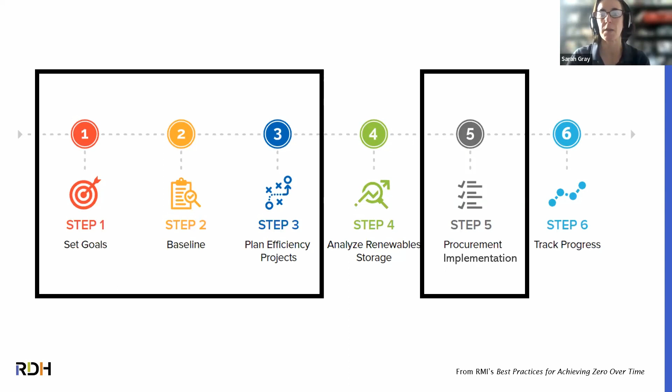I mentioned one of the first steps after communicating and documenting goals for a deep retrofit project, and that's really the baseline building assessment. For folks who have started to look at retrofit plans, hopefully you've implemented this and are familiar with these steps where we want to take existing building documentation, such as the original construction drawings or architectural drawings, looking at previous condition reports or maybe energy audits, and understanding the current state of the building. That work may also include a visual review of the building elements, including the mechanical systems and the building enclosure systems. We also may, depending on location of building, want to look at the structural and seismic condition of the building, because when we do deep retrofits, those can also facilitate any seismic strengthening or retrofit that may need to be done.

Beyond the physical building condition, we certainly want to analyze the utility or energy data for the existing systems. How efficiently are the mechanical, electrical systems running? What kind of use - is it in line with similar buildings of a similar age? Is it way high? Is it way low? Just understanding the building as it's operating in its current state. So that's the baseline assessment.

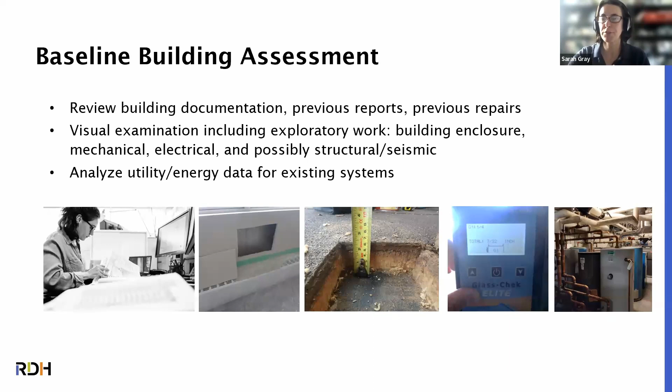From there, RDH has found that there's typically a formula for the deep retrofit plan, regardless of building or location. Of course, there are custom pieces depending on repairs that have already been done or systems that are in place, but the formula for the deep retrofit is typically as follows.

We find that we typically need to retrofit the building envelope as one of the first steps, because if we improve insulation values, reduce air leakage through the windows and wall systems, we can reduce the loads that the mechanical systems have to supply. So this building envelope work is pretty hefty, but it's addressing the passive system to enable a better performing, more efficient mechanical system.

That's the next piece - looking at energy efficiency measures, which could include LED lighting, tweaks or optimization of the heating and cooling system, and looking at ventilation that's currently provided. As part of a smaller scale retrofit, we could recommission those systems to perform better using the current equipment. That could be a short-term step on the road to a deep retrofit.

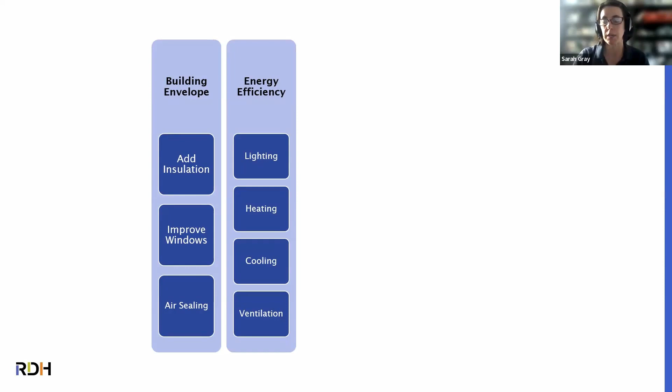The big step, however, as most of you could appreciate, is decarbonizing the fuel system. That's what we typically call a fuel switch from gas - natural gas or oil even - to an electrified system. Owing that some grids in Canada are still quite dirty, and hopefully there are plans in place in those jurisdictions to make the grid cleaner. Ultimately, we expect that many or most systems, depending on location, will get fuel switched.

You may have seen ground source heat pump, air source heat pump, VRF systems, or other high efficiency, typically electric systems to get us off the gas and reduce those greenhouse gas emissions. So that's the bundle of systems.

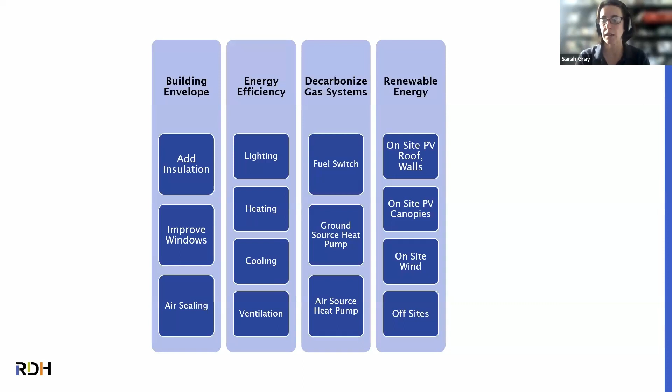I mentioned renewable energy - we won't go in depth today, but really the point of renewable energy is, one, a resilience measure. If we're generating electricity on site, we're not dependent on what's going on at the grid or other systems. We can also further offset our greenhouse gas emissions or energy use by generating our own electricity on site. Then the final piece of some deep retrofits, again depending on all of the other four buckets, is to purchase offsets to get to a net zero carbon, net zero greenhouse gas condition.

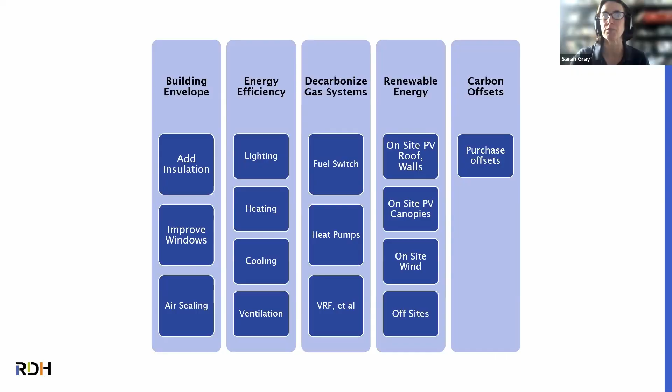Okay, so hopefully that gives you a high level view of what a deep retrofit plan typically consists of. Drilling down a bit for enclosure or building envelope retrofit options, as I mentioned in that first bucket, we're looking at the cladding.

The cladding retrofit typically means an overclad to provide more insulation. It could be a full cladding replacement where all of the existing cladding is removed, stripped down to bare bones, and reinstalled with a high performance system. There may be some thermal bridges such as balcony slabs or exposed floor slab edges that need to get over-insulated to reduce those thermal bridges.

For windows, if we have a fairly good window system, we could extend their life a little bit by adding weather stripping or sealing. But ultimately, we expect that windows would need to get replaced with a double or triple pane IGU system, or even quad pane glazing in some far north climates that are more severe.

Jurisdictions are starting to allow fiberglass frame windows that provide a bit more performance than aluminum frame systems do. Certainly there are passive house window systems coming to market, a bit tricky getting those from Europe to here, but we do know of projects using passive house rated window systems.

Roofing typically would be dealt with at the end of service life, looking at adding insulation to the field of the roof to provide better performance. That approach depends on the building form. If we have a tall, skinny building with a fairly small roof, it may not make sense to add insulation to the roof, so that's one of the pieces we'll assess during the information gathering step of the retrofit plan. For underground parking garages, we typically want to insulate the soffit or ceiling space under the occupied building footprint. You typically see that in new construction, but older construction may not have that insulation.

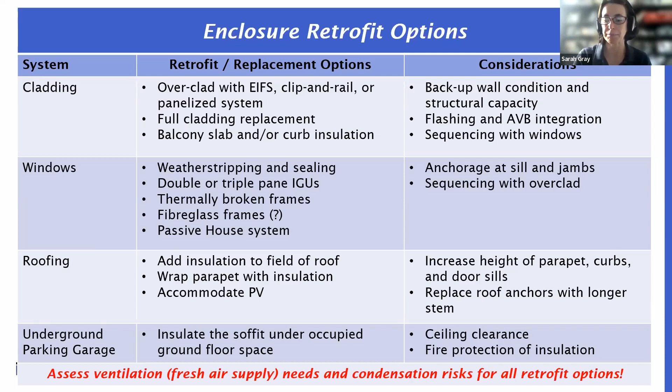Speaking of which, these are the mechanical and electrical retrofits that we typically see. Again, not every step or feature applies to every building, but this is typically what we're seeing, and hopefully you guys do too.

For heating, we're switching from electrical resistance or natural gas fired systems to an electrified heat pump that has better controls to help that system run more efficiently. And thinking about domestic hot water, how we can recover heat from the drain water to preheat the domestic hot water.

In terms of cooling, we find that many older residential apartment buildings in Canada do not currently have cooling. That's true across the board, from Atlantic Canada to the buildings I work with in Ontario and also buildings out west. They just don't have cooling. And because our summers are getting hotter and more intense, and unfortunately with Alberta dealing with wildfires, and British Columbia in the past, you can't always open your windows for free cooling and ventilation.

We talked about ventilation and fresh air; certainly those pieces should have energy or heat recovery to make them more efficient. We're also finding that many older buildings need a full electrical service capacity upgrade, at either the building level and/or the utility transformer level, which is a major piece of the puzzle and one of those enabling measures that will need to get done if we're adding electrical load at the building.

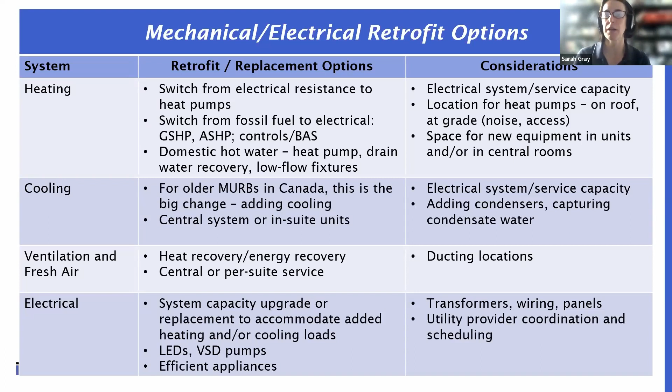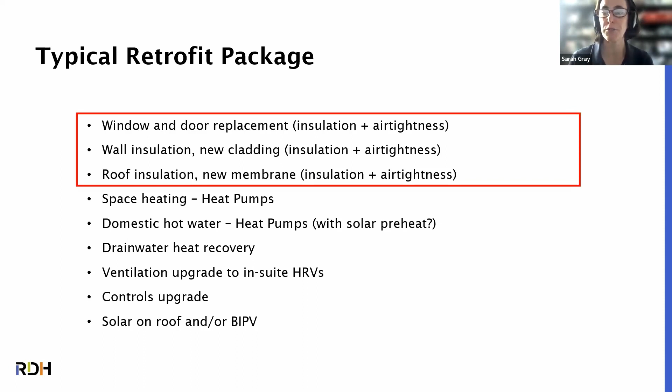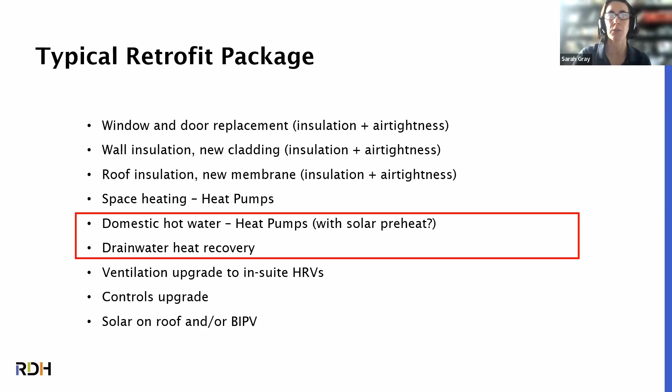We talked about some energy efficient measures, so let's talk about that typical retrofit package, rolling it all together. The first three bullets are the building envelope retrofit package. Next is space heating, switching to probably a heat pump type system or possibly other options depending on the specific building case. Looking at domestic hot water, again moving eventually to a heat pump system, possibly with a solar preheat system depending on the jurisdiction. We talked about drain water recovery, and then that ventilation upgrade, in-suite or central HRV or ERVs, control upgrade as well, and that solar piece.

As that package is put together for the building, there may be various timing changes. You may not do those first three enclosure bullets first; maybe your envelope is okay. Maybe you're going to address space heating and/or cooling first because the boilers are 30 years old and 80% efficient, and those need to get dealt with from a service life and efficiency point of view first. There are a lot of options, and it's a team effort working with the consultant team and also the ownership and building management team to create a plan and order of implementation that makes sense for the particular building.

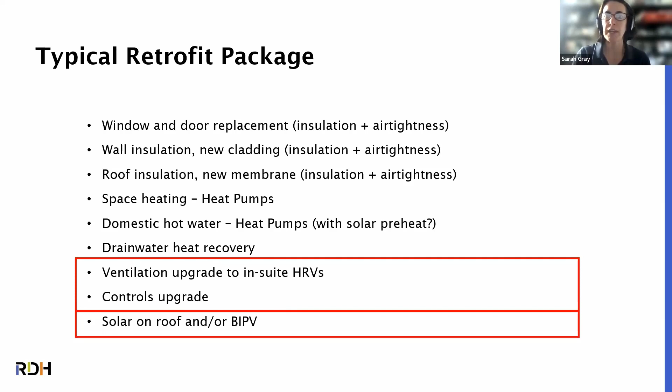I'm not drilling into specifics further on this. I could give you oodles of examples, and I think we may all have a picture of what these pieces mean. I think we'd agree the ultimate goal is to conduct not only a retrofit at scale, but to have panelized overclad at scale, with off-the-shelf mechanical systems at scale that we can plug in, maybe even as part of this cladding overfit.

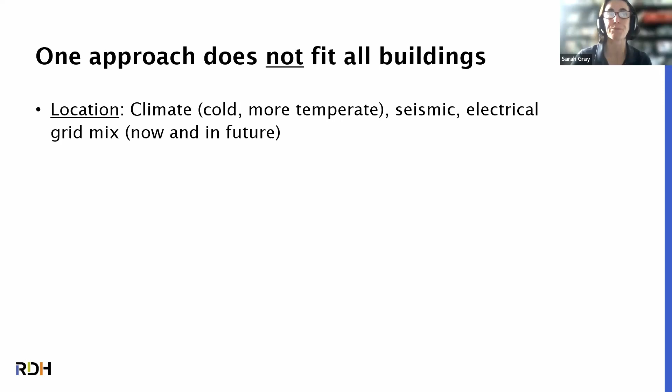And the electrical grid mix now and in the future, as I mentioned, and certainly does the building itself have electrical system capacity? Then zooming into the site itself, how is the building located?

We're finding in Toronto and bigger cities that many of our older residences, mid-rise or high-rise, are on very tight sites, which is great for urban density and a rationale for retrofitting. But it's very difficult to add insulation to the outside without triggering site plan approval, zoning bylaw amendments, and other jurisdictional approvals. Not to say we can't go through those hoops, and in some cases we are, it's just another layer of complexity to these deep retrofits.

The building form is also a consideration for the approach. Is it a flat box, low rise, mid rise, or high rise, that may lend itself to an at-scale panelized cladding approach? Or does the facade have a high level of intricacy that really necessitates a bespoke, manual, hands-on retrofit approach?

And then, of course, we have funding and incentive demands and requirements. I know the CIB has touched on some of these sessions. I'm not going to tackle funding and incentive, but on the projects RDH is working on in BC, we're working hand in hand with funding and incentive providers, and those particular programs have specific requirements and exclusions. Again, meaning it's not a one size fits all retrofit approach. We have to customize the plan and the details to meet that building's requirements.

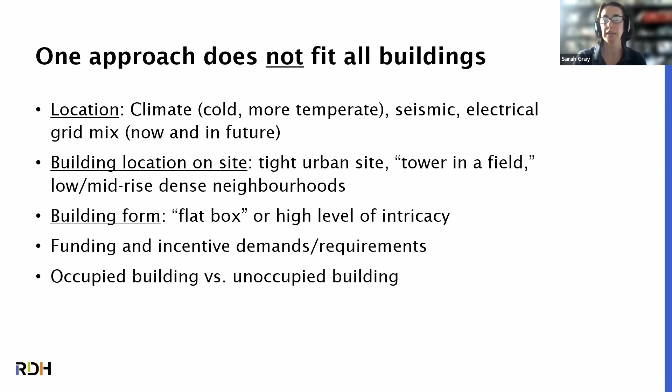Likely not new ideas to many of the folks on this call, but I wanted to highlight these intricacies. So I've touched on a few things, but I wanted to put a stake in the ground in terms of some of the lessons learned so far. Retrofits are complex projects. We hope to get to an at-scale, replicable model soon.

We're not there yet. I want to talk about project team. Retrofits are a team effort. We could have utility or funding clients, the building owner who's possibly paying for these projects or cost sharing with an incentive program. And then we have a consultant team of designers and engineers—architecture, building envelope, structural, energy modeling—maybe various mechanical consultants, electrical consultants, and specialty consultants.

So all of this team has to come together to be on the same page. Not to say that the size of the project or team makes it complex, but one could imagine getting everybody together for meetings, getting everybody together in terms of deadlines. It takes a village. So at the beginning, we want to identify and enable a team lead, potentially a single point of contact that can work with the design team and also the stakeholder team to serve as a clear line of communication. And as I mentioned, engaging regularly with the client and project team—weekly meetings, bi-weekly meetings—to make sure progress is being established and everybody is moving down the same path towards the same goal.

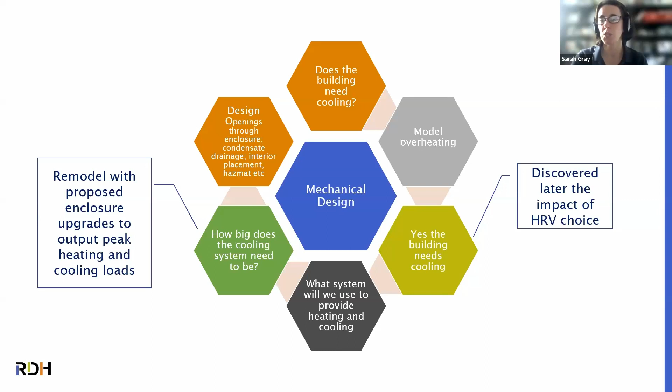And then we went through the design options and some really fine granular design detailing that needed to be done around that cooling system. So this is just one facet of the design questions and answers that need to be accommodated within the design process. You can imagine many other questions coming out related to heating, electrical, plumbing, enclosure, roofing, walls, windows. It's not just as straightforward as 'improve the building envelope' or 'improve the mechanical systems.'

And lots of coordination, several packages—not quite as straightforward always as a simple design-to-construction-documents package. There may be variations within that theme and within those phases, so that all pieces are coordinated and approved by the building owner who's buying this design.

Another big lesson is to let the building lead the design. Again, there's not always that one-size-fits-all approach. Each building will typically have its own peculiarities.

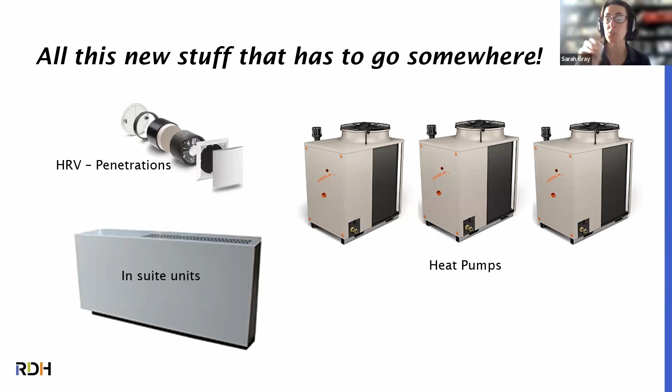One of the pieces we found is we have to put all of the new stuff somewhere in the building. That includes HRV packages and the penetrations that go through the wall or the roof. We mentioned heat pumps—those have to go either up on the roof or somewhere on the side at grade that's out of the way. And we have in-suite units, typically new in-suite units, that will have to be placed somewhere and serviced with electrical or piping. It's all got to go somewhere. This is a screenshot of a roof plan on one of RDH's retrofit projects.

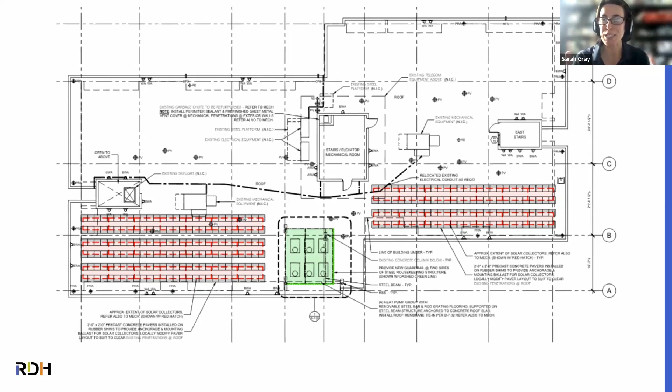The red blocks towards the bottom are new solar preheat panels, and the green is where we landed on putting the new heat pumps. So every building design team will need to look at a similar plan to understand where all the stuff goes.

Looking on the inside, I know the font is tiny here. This is just the mechanical schematic. Where are we going to fish through all of the stuff through the height of the building to service the suites, to deliver the new heating, cooling, electrical systems? It is a puzzle, I will tell you.

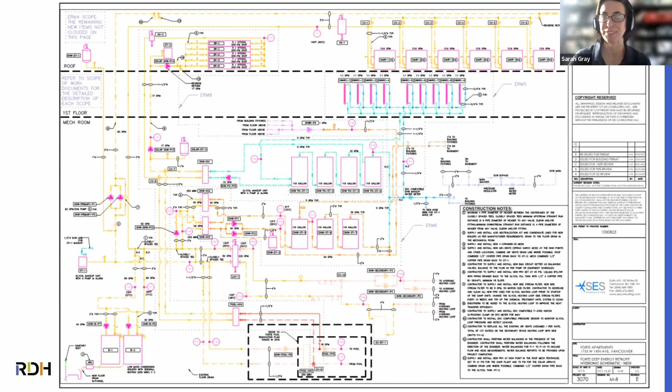The other piece that maybe some folks don't think about, because it's not as glamorous, is thinking about how the facades will be accessed for the retrofit itself and for future maintenance. So looking at wall or roof anchors and fitting those within all of the other new stuff that's going onto the building.

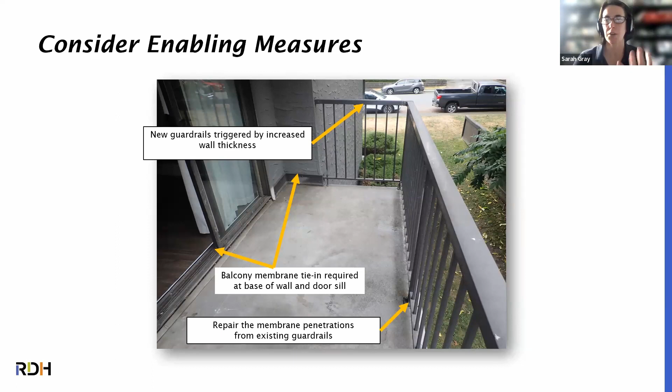So this is really zooming into granularity, but you can see that it's not always a one size fits all solution. Tons of other things to think about.

Maybe some folks on the call haven't hit these roadblocks or hurdles: fire sprinklers, fire stopping. You open up a wall on the inside or the outside and you discover what may have not been done during original construction. Certainly our older 70s and 80s buildings could have hazardous material, particularly ACM. So there's a layer of abatement that will need to happen before the fun retrofit can occur.

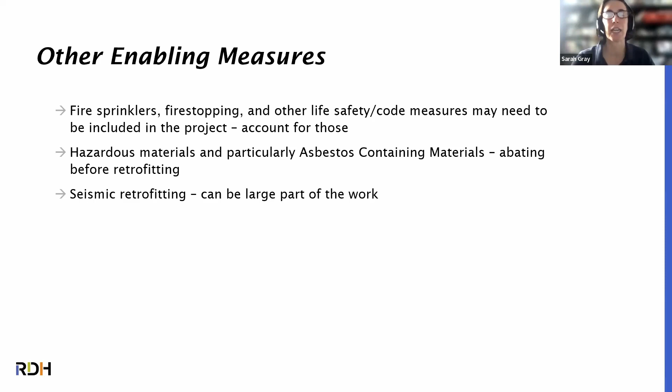And I mentioned seismic retrofit previously. We want the whole team to be solutions oriented. What does that mean? Of course, projects of this complexity could die in any manner of things. The project could get bigger as we uncover unforeseen conditions or things like hazardous materials. There can be contract issues between the owner, the consultants, the owner, the contractors, permit issues with the authority having jurisdiction. Tons of technical challenges that I mentioned.

And of course, many of us now are dealing with the fact of inflation and escalation. We may have budgeted a chunk of money a couple of years ago, but that chunk of money does not buy us the same thing today. Also dealing with supply chain issues, a shortage of the labor market.

The project could die, but it takes that team of folks to be proactive, to foster a positive attitude, to work through those hurdles, to help the project get implemented. That may mean a redesign or a phasing change or approach, but that's okay. Let's bring those ideas to the table to help keep the project alive.

Certainly, we want to treat the client as part of the team. We need input and information and decisions from that client team to help move us along through those design and construction phases. Developing a detailed schedule early helps. If you have it, you can change it. If there's no schedule, it can become a big unknown and a roadblock down the line.